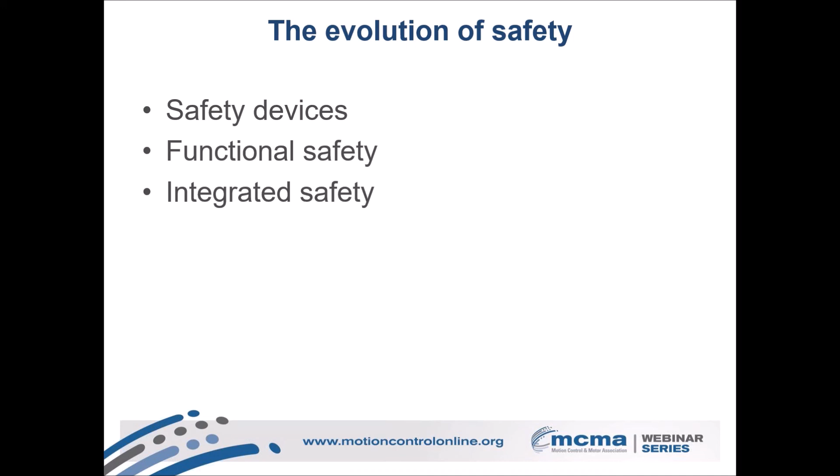But first we should probably look at the overall evolution of safety. It started out years ago with the aim of protecting operators, obviously from damage and mayhem and that sort of thing. It evolved subsequently into functional safety—I'll talk about that, which is much more of a systems-oriented rather than device-oriented approach towards safety. Then more recently, the components and functionality that enabled the latest generation of functional safety are really being advanced by integrated safety. By tying things together, that's where we get the real benefit. And that's the main thing I'll be talking about today.

The philosophy of safety, the overarching way to think about it, is that you want sensors out there looking to detect anomalous behavior by the operators of machines. What happens next isn't necessarily defined by a specific state—it's really the goal of getting the equipment and the machine to a safe state, some sort of known safe state. For example, if you're talking about the field bus aspect, if you're using some sort of machine-based network, the safety philosophy is that the system really just needs to know whether there is a flaw in communications. If it detects a flaw, its job is to bring the machine to a known safe state so that nothing bad can happen at that point. So that's the underpinning behind all the systems we'll be talking about today.

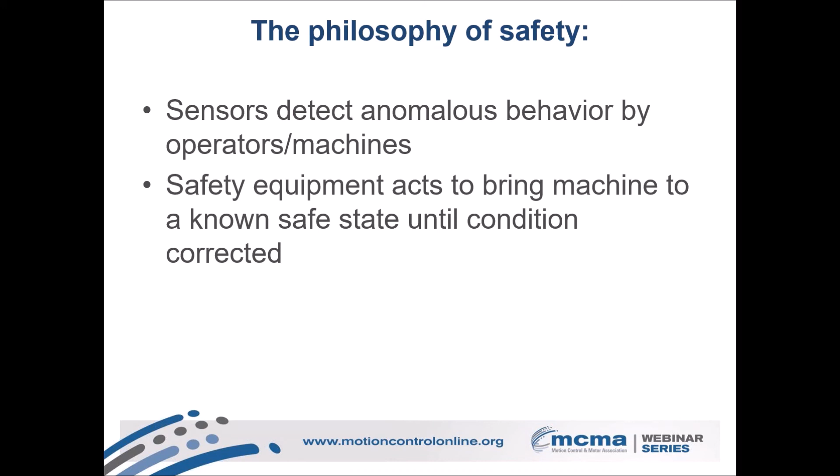Traditional manufacturing was the same thing we've heard about over and over: fixed machines, consistent product. You've got companies manufacturing the same thing 24/7 on a dedicated line, and safety was very much from the standpoint of protecting operators—you want to separate people from motion, make sure they can't get hurt. And that was something that could be implemented very statically because you had the fixed machines and the consistent manufacturing.

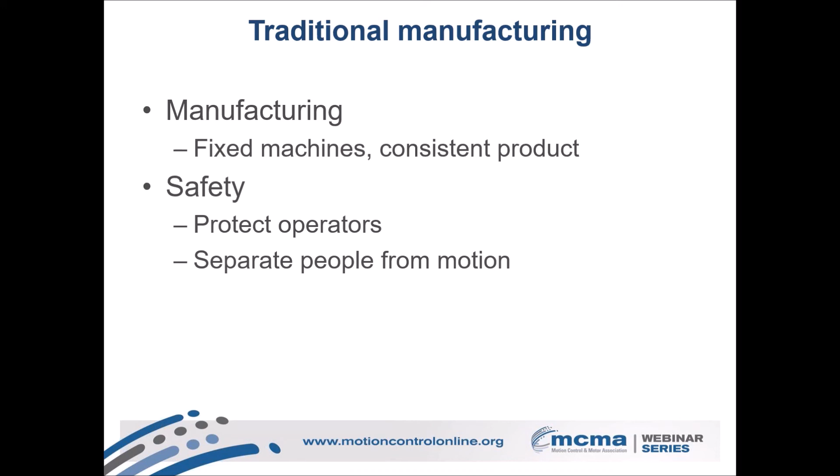The overall design was very much to place safety within the devices. So you put up a barrier, you put up a light curtain, you put in a pressure mat, and the idea was pretty much go, no go. And you might use a controller to make all of this happen.

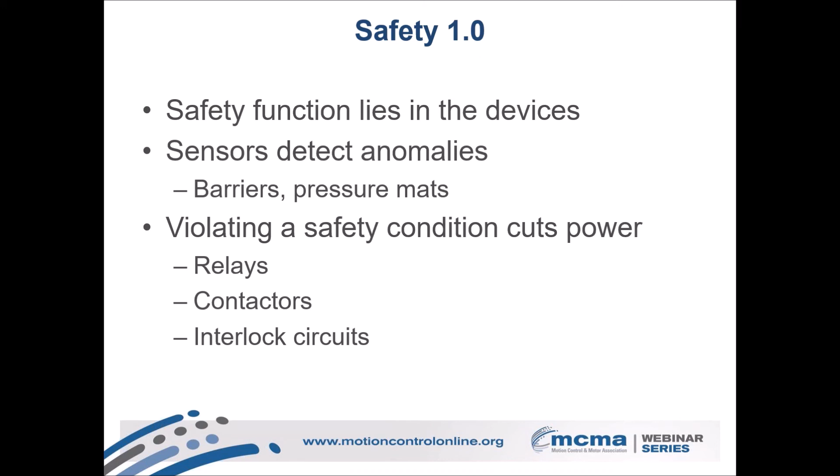Typically, things were hardwired back in the day, and you wind up with basically cut power. If something happens, somebody walks through a light curtain, they open up a barrier, you get a door interlock, your relay goes bam, and the system shuts down. And that, of course, can be a problem if what you're doing is trying to manufacture stuff.

And that's where you kind of wind up with this sort of uneasy relationship between safety and productivity, because on one hand you want to protect operators, but part of the act of protecting operators means shutting down the line, and your safety 1.0 kind of implementation.

Productivity goes down, throughput goes down, and these days there's so much focus on OEE that people are really looking at those numbers, and unfortunately what you can wind up with is operators well-meaning and sort of focused on, hey, do the best for the company, do the best for their shift, trying to do workarounds. We'll talk more about that in a minute.

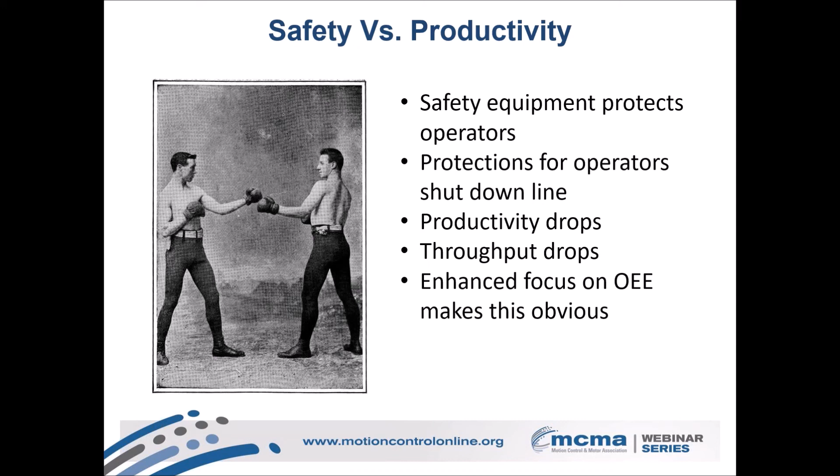But that's particularly become an issue these days because manufacturing is different today than it ever used to be. Everybody's looking for customization. We're all after the fabled batch of one, where you can get people exactly what they want, and that means that you've got your lean inventory, you've got manufacturing on demand. You need to be flexible. You need fast changeovers. You need frequent changeovers.

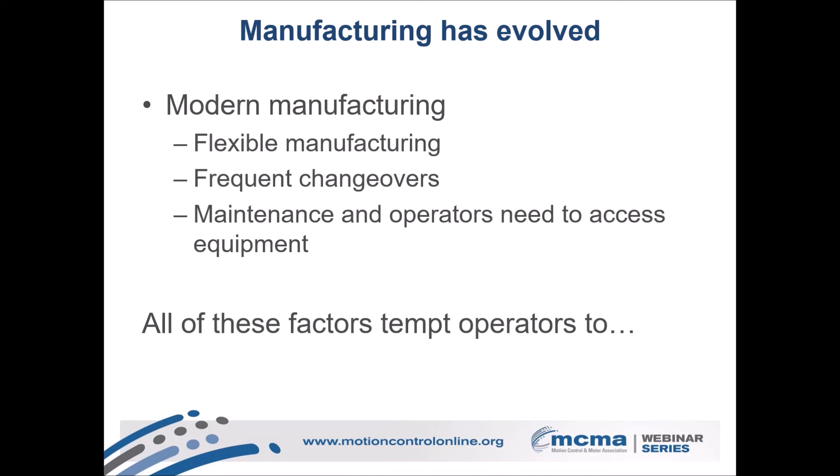That means your operators need to potentially get in and access equipment. Your maintenance people potentially need to get in there as well. And unfortunately, what happens is you get people wanting to, again, find workarounds.

One of the people I interviewed a month or two back for the article I wrote said that she absolutely hates relays because they're so easy to rewire. She says people can do a workaround and that's taken care of, and maybe it lets people keep running the machine while they're opening enclosures and stuff.

But if you wind up with situations where you had static manufacturing, like in this example, you've got something falling off a conveyor belt, and maybe if you had a consistent 24/7 dedicated line, you'd put up a guard and you keep those boxes from falling out so people wouldn't get irritated that they keep having to stop the line and go in and pick up the box, restart the line, lose numbers and all of that.

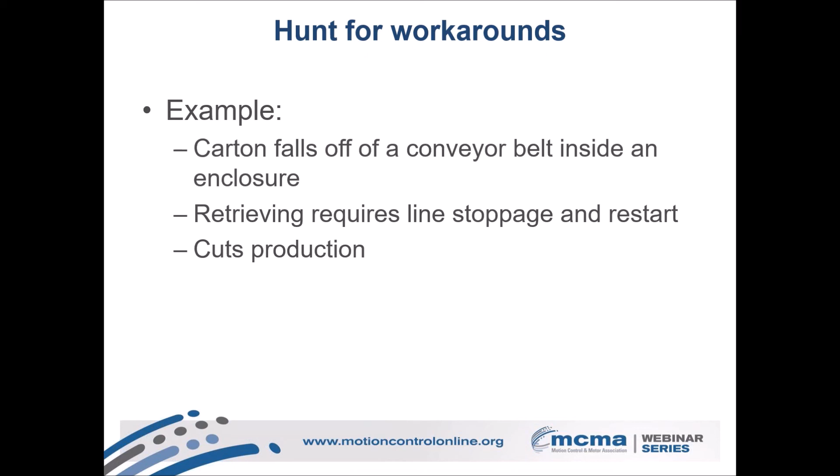But if you're constantly switching around inventory, maybe that's not practical. So what happens? You wind up with people getting the bright idea to rewire the relay or bypass the interlock. Maybe they forget to switch it back. Maybe it's just easier to leave it that way.

Now you've got engineering and management, they think the area is safe. Somebody's going to get hurt one of these days that doesn't know about it, kind of thing. And like I say, she was seriously ranting about how much she doesn't like them because she thinks it's dangerous.

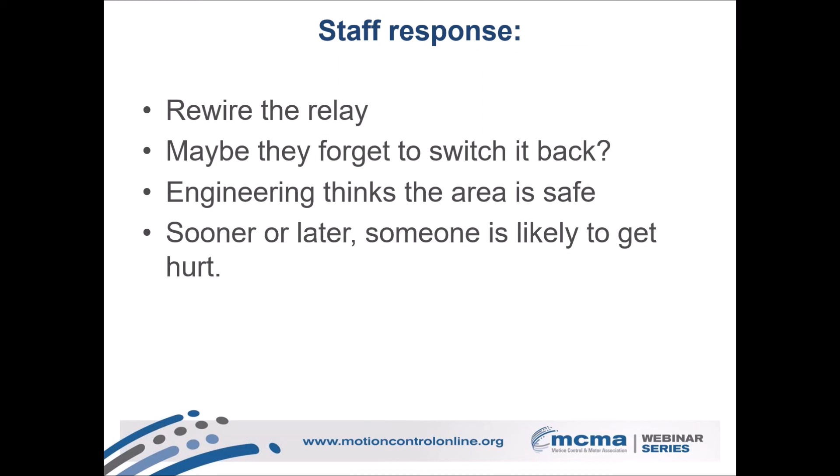Going to smart safety gives you a much better way of attacking these kinds of problems. So that is part of what sort of led to the evolution toward functional safety.

And the idea there, for those who are familiar with it already, is it's very much putting safety in the function of the system. So instead of safety kind of residing in the component, say a pressure mat, you step on it, bang, it's going to stop the machine, now it's the safety in the operation of the system, which goes back to what I talked about at the very beginning.

The philosophy is to create the safe operation of the system. If something or someone goes outside of the operating parameters that you set, the machine needs to recognize that and go to a known safe state. So that's very much systems-based.

Now, it's important to note, even though functional safety has really become tightly associated with some of the more sophisticated techniques we'll be talking about, it can and is implemented with basic safety components like we've been talking about, and implemented with relays. And that might be the best approach.

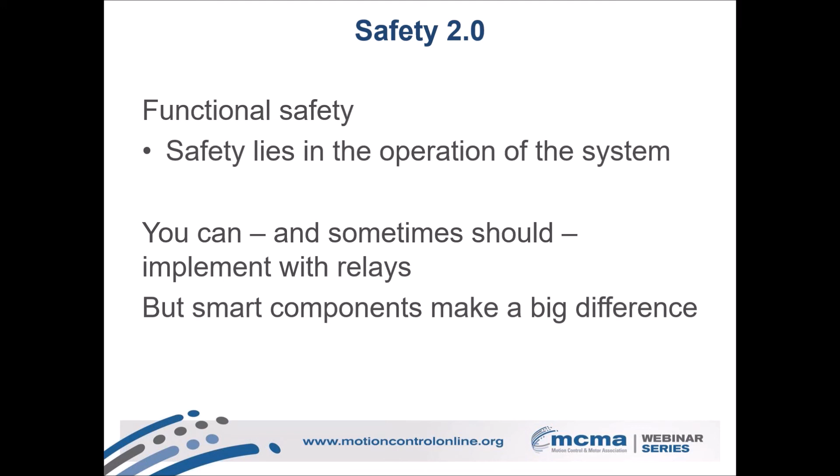So certainly one of the things they took away from this whole project is there's, as with pretty much anything in engineering, there's no one right answer. And there are systems out there, relays are the right way to do it. That said, smart components can make a big, big difference in functionality and everything else.

So going on to modern safety equipment, the idea is still let's protect operators from injury, but safety is a much broader definition than that. It's about protecting equipment from damage, and these days it's also about protecting revenues and performance. It's as much about, first and foremost, it's about protecting human beings, but after that, it's really a profoundly powerful tool for protecting the bottom line.

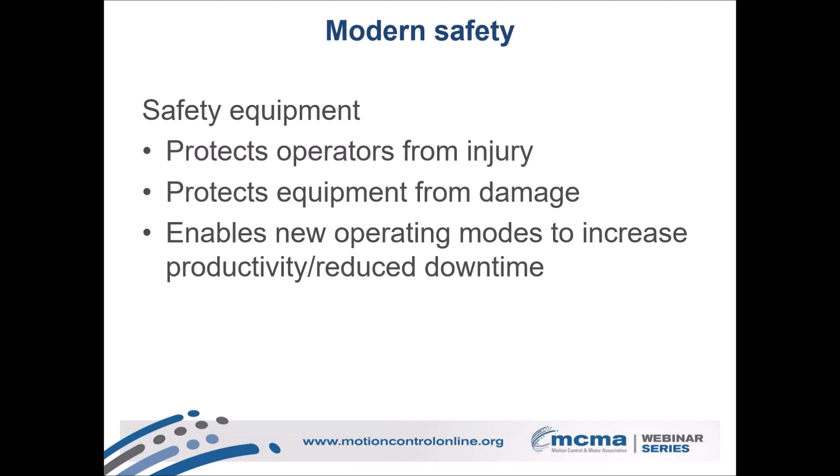As far as the safety standards that underpin that, anybody who's looked into this knows there are dozens of them out there. But the key one for the purposes of this discussion that we really care about is IEC 61508, the primary functional safety standard. It defines the safety integrity level framework that sets a limited number of errors at the -6, -8 levels, so you have to have equipment in place and tested to operate to those levels.

62061 runs through the implementation of 61508 and is particularly applicable to motion control. If you want to swing toward ISO, 13849 is the ISO version of functional safety, and its version is safety performance level.

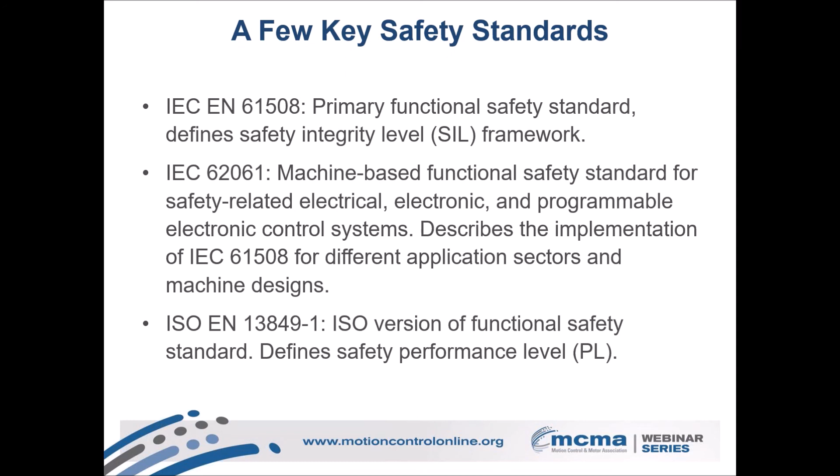If you look in the various functional safety standards, part of what is really valuable about them is that they define a number of much more nuanced functions. Most people are probably familiar with safe torque off, that's gotten to where it's pretty much a standard. Not every drive has safe torque off, but an awful lot of them do, and it's really specified into a lot of machines.

What happens with the rest of these functions really depends on where you're at and who you're dealing with. In Europe, the functional safety standard is a regulation, so you wind up with a lot of broad use of some of these functions I'm going to be talking about. In the United States, not so much, but that is increasingly being adopted as end users and OEMs are starting to really recognize the value of having some of these functions.

So you've got your safe torque off. You've got a safe stop that sets up a method for safely braking high kinetic energy equipment, but doing it quickly, and that sets it up for safe torque off. The key point about safe torque off is, unlike relays that just cut power, safe torque off takes torque off from the motor via the drive. You don't actually shut down the equipment, and that means startup is much faster. It's also easier on the equipment.

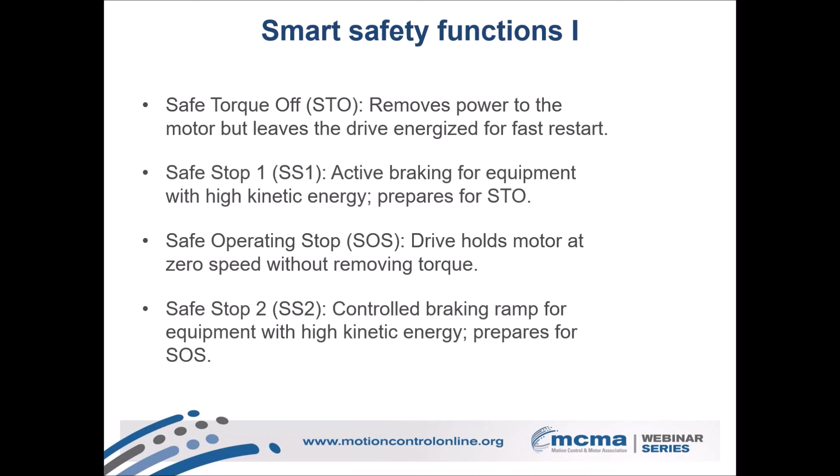Another safety function is external holding brake. That's important, especially for motors holding loads on vertical axes. And then the next three are the ones that are really interesting. There's a bevy of other versions of these functions, but I'm just presenting a selection.

Safe limited speed lets you set up a maximum speed so you can only go to a peak level. You can also set up a speed range, high and low, so your drives can only command the motors to run within that range. Safe direction means that if you have a rotating axis, it can only rotate towards you or away from you, so you've got the ability to really constrain motion. Safe limited increment lets you support jog operations.

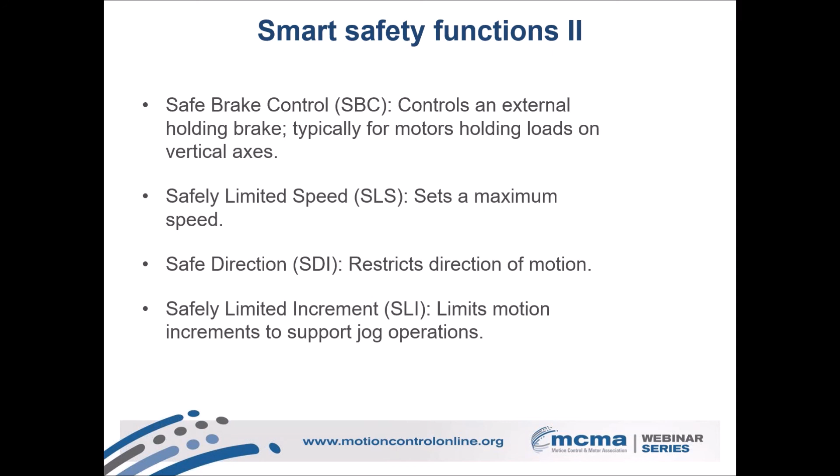What these things can do for you: during cleaning operations, or if you've got a jam, you're able to only have rollers move away from the operator. So the operator can use safe limited increment, clear the jam, and do it in a way that doesn't present any hazard to them, but also speeds recovery. It means the machine handles the recovery instead of the operators having to get in there, so things happen faster, with better productivity, and everything's safer.

So let's take a look at a couple of examples on what that exactly means. If you've got a printing machine, you have to clean the rollers, right? And if you want the old school approach, that's clean the section, then you step out, close the enclosure, start things back up, you jog the machine, you come in, you clean.

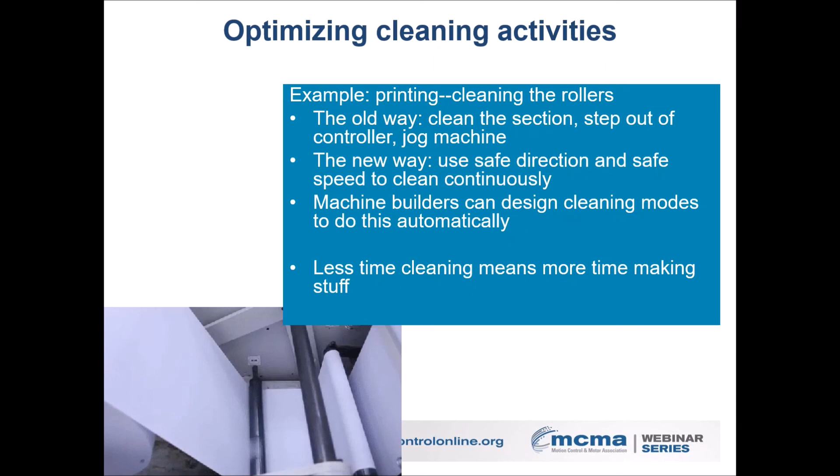And now that you've got your interlock coming into place, it shuts down the machine, repeat over and over. Now you can use safe direction, safe limited speed, and you could be in there cleaning it continuously. And you can have specific cleaning modes to let you do this automatically. So less time cleaning, more time making stuff, higher OEE - we like all that.

And here's a particular case study, food and beverage. So this was a company that spent time doing the clean and jog cleaning, and 6 hours a day they spent just cleaning. They implemented a version with safe speed, safe direction. They used safe position protocol, which limited the safe operations when the enclosures breached. It cut the cleaning time down to 1/3 of the previous time. That's an extra half shift of production.

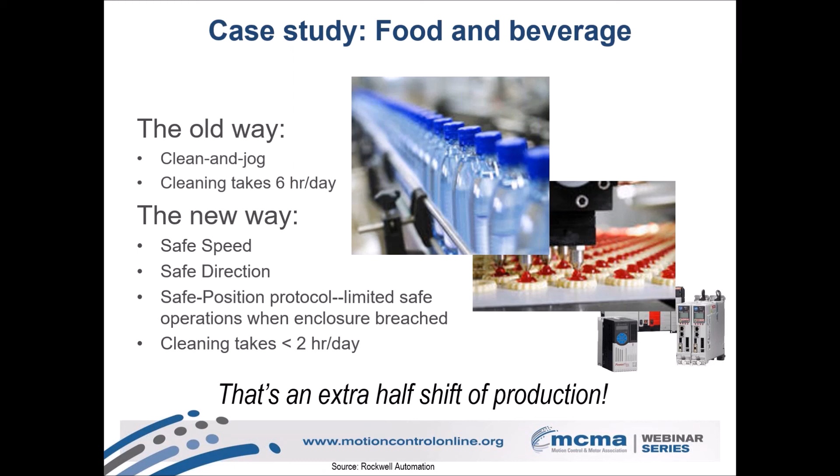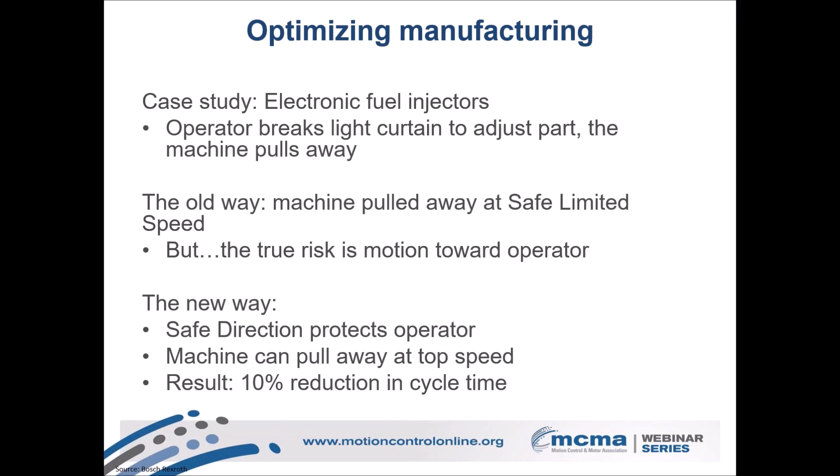Another example, electronic fuel injectors. That was something where the operator had to break the light curtain to adjust the part, and the machine pulled away. Now the end user/OEM, they were already using safe limited speed, and that sped up things a certain amount. But the thing they realized is, because of the application, what was really important, or dangerous, was motion toward the operator. When it was motion going away, it didn't matter, so they could go top speed instead of pulling away at safe limited speed. And again, 10% reduction in cycle time.

10%, you can take that money, you can increase production without higher capital. You can maintain production with fewer operators. You can take that time for preventive maintenance. 10% is a big savings.

And that's the thing to keep in mind with these kinds of systems. The sense I get talking to integrators and OEMs and folks out there, the end users even that I've spoken with - people are starting to get the fact that you have big savings. You can get ROI on this. You get lower total cost of operations.

And that's something that's of increasing interest out there, especially in the end user community, because you can get that savings. You've got to get everybody involved in the specifying. If you're just going in through engineering, you're probably not going to get much buy-in as far as cost of ownership. You might get buy-in as far as uptime and productivity, but the thing to keep in mind is you can go so much farther than safe torque off.

So it's really a competitive advantage angle. And the kind of buzz that I'm hearing is in the next couple years, it really is going to start seeing huge levels of uptake. There's already a significant uptick.

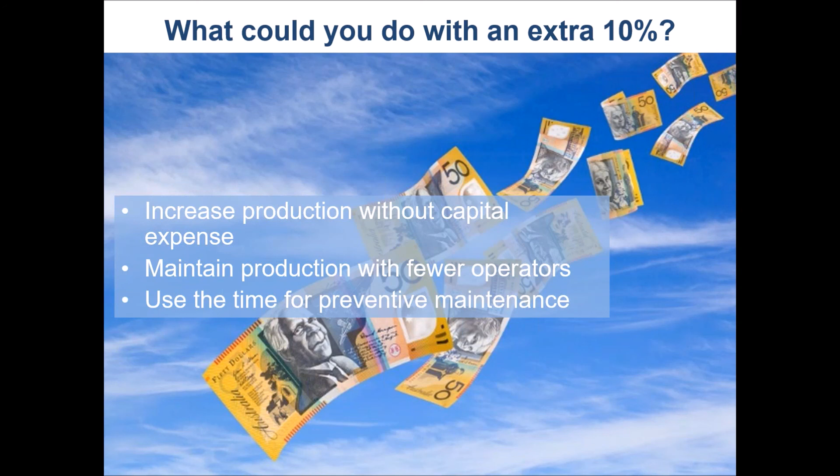So the thing to do, again, and I was just kind of ranting about this - it kind of changes the way we're looking at safety. Safety was a response: the anomalous behavior hits, we cut power. But at this point, it really becomes more of a process. This behavior happens, here are the things that we do. Here's how we respond. Here's how we make sure that the machine goes to a known safe state.

And maybe that known safe state is, as I talked about in the earlier examples, it pulls away at top speed, but only in a safe direction. So a known safe state doesn't have to be safe torque off or safe operating stop. A known safe state can be just constrained operations that let you get done with what you need to do without putting anybody at risk, and also without putting your production at risk.

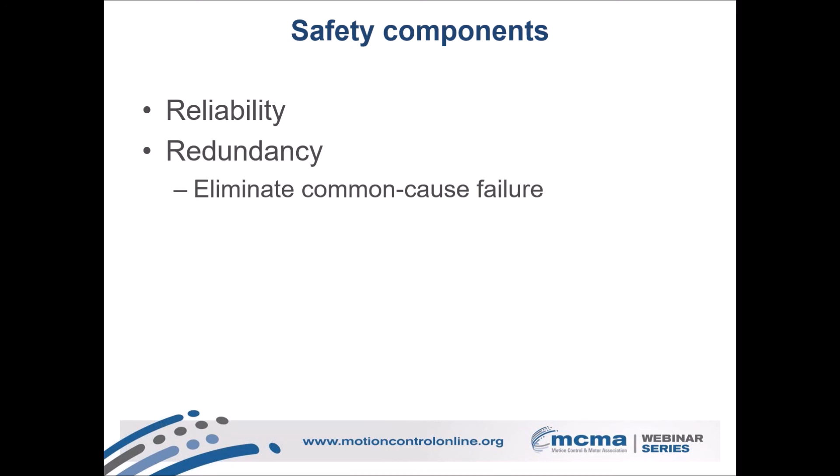So with safety components, kind of the key thing we care about there is you really want to be thinking in terms of reliability. It doesn't do you any good to have a safe system if the safe system fails. The other thing you need is redundancy, because if you've got a safe system, but it winds up with a failure mode that matches the failure mode of some other part of the system, then it's not going to be able to detect error. So that's really the key thing you always have to be thinking in terms of: how do we avoid common cause failure.

Drives and controllers lie at the core, pardon the pun, of safety. You wind up working in terms of dual core processors, and that's key to making sure your safety calculations are happening in two different physical locations with two different physical pieces of equipment.

But that alone isn't enough. Remember, we're talking about common cause failure. You've got to be using different logic. In most cases, or in many cases, you have different chips. You can even potentially be using different manufacturers.

The language that gets used a lot is homogeneous versus heterogeneous. If you've got a drive with a dual core processor, is it homogeneous where you've got identical cores, or is it heterogeneous where you've got two different cores? In that case, if you've got an interpolation error common to a particular processor, you don't want that to affect your safety. But if you're using a different algorithm and checking to see that you get the same response, maybe that takes care of using the homogeneous version.

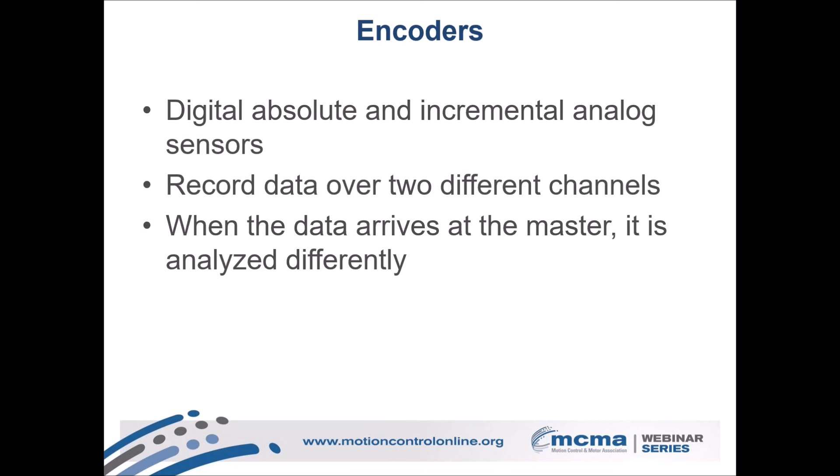Software, same thing. You've got to use multiple different algorithms. You'll have internal checks. You need to verify equipment's installed and operating. In a lot of cases, checksum codes can be used to detect anomalies, and also to detect whether changes have happened to the code. You'll want to use permissioning, access limited by job role, so engineering maybe can save changes, maintenance can only view, operators can only view, that sort of thing. And again, it's just that theme of protection, protection, protection.

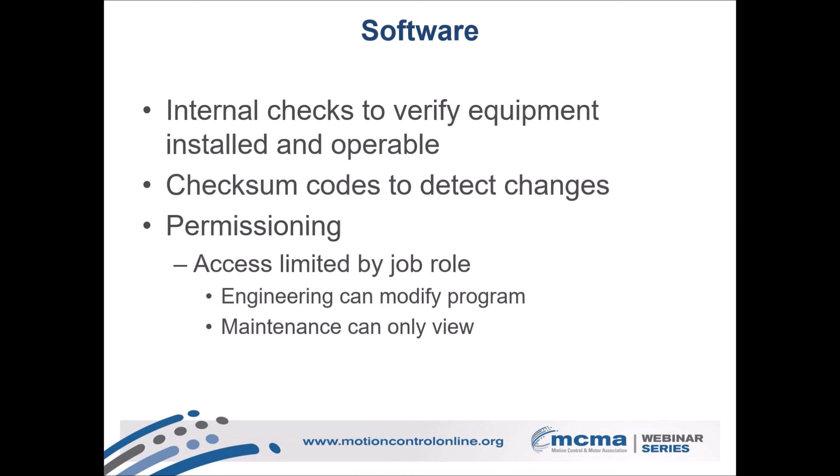So, as I said earlier, you can do functional safety without smart components, but you really need the smart components to get the best. And to get the best from the smart components is where we really start looking at integrated safety, because that's what brings it all together.

That's where you start getting large benefits in terms of speed. You're going to get faster response, easier implementation. In a lot of cases, you can use less hardware. Because of that faster response, maybe the clearance distance or offset you have to use isn't going to be as large, because you don't have as much latency involved. So it goes back to that same thing: you can keep everybody safe, but you can also keep the bottom line safe.

Because ultimately this comes down to productivity, and the thing that is really worth investigating in all these systems is finding out just what the ROI is, what the likelihood is of getting savings, how quickly you can pay for that system. And you might be quite surprised.

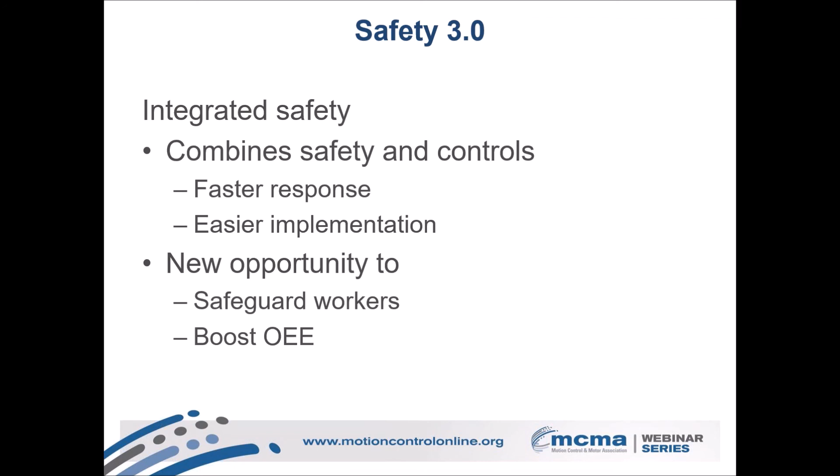So integration levels go at a couple of versions. You've got integrated software, and that's pretty common in terms of having an integrated software environment that makes it easier to implement, because the programmers and the users look and see the same thing all the time. But it also simplifies programming.

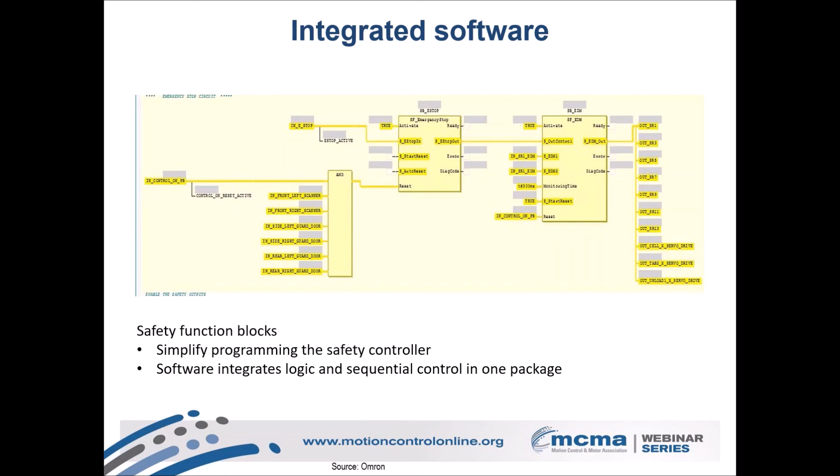In a lot of cases, you can get systems that will map variables over. So if you're defining variables in the safety system, they can automatically map over to the operational system. And that gets pretty detailed. If you've got a complex system, a high axis count, a large number of sensors, that can start getting tricky, making sure everything gets done. So being able to have integration is a big help. It can be as simple as reset buttons and start commands that can really speed up troubleshooting.

I was talking with a programmer who said a lot of times you get troubleshooting going on, and you've got maintenance running through all the screens. If they're having to go separately between safety and operations, they're running through all the safety stuff first because they've got to, and then they find out at the end that the fault was actually invoked by the motion system, and it's just waiting for a command, and somewhere a variable got mapped wrong.

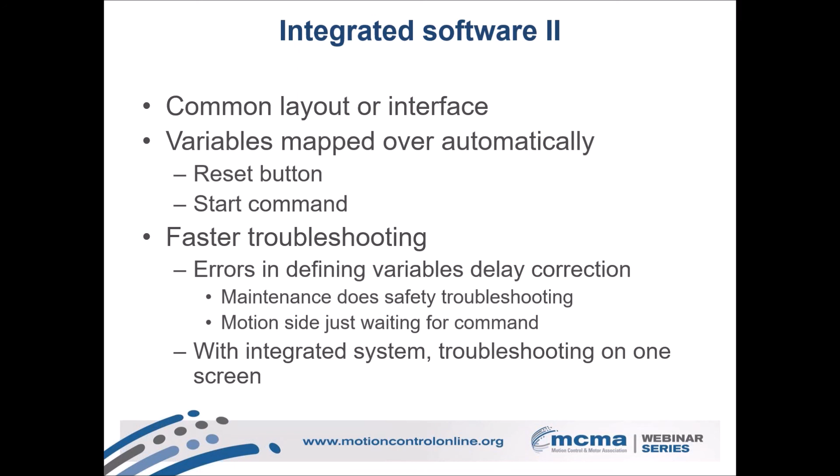So again, the level of integration with software can be really helpful. And that's just an example of one of the screens that you can look at and be able to see automatically the status of equipment.

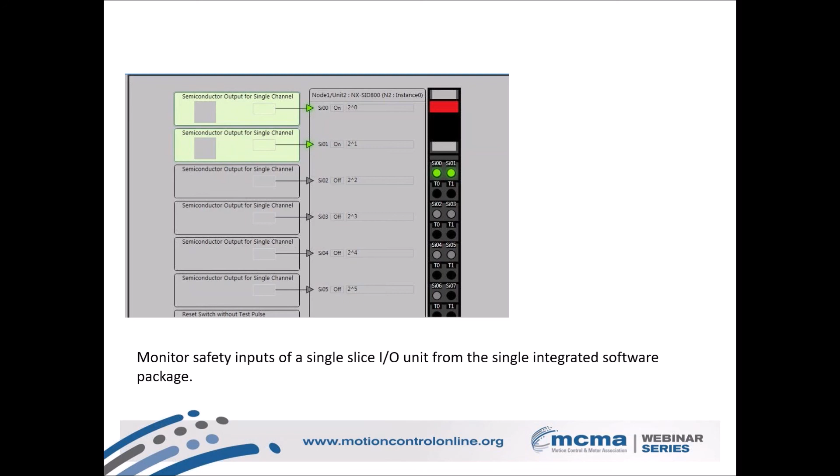And this is where we get to the interesting part, because when I started into this, I was trying to figure out kind of what the basics are with trends and so on. As I said, no general trends.

So let's start with the general safety system implementation, with the understanding that just as soon as I say this, there are going to be people out there in the audience raising their hands saying, wait, ours doesn't work like that. But in general, we start with sensors, we have a safety controller, we have the machine controller, motion controller, and the drives. When I say machine controllers or motion controllers, this can be implemented pretty much any way you like. You've got a lot of safety PLCs out there, and the rule of thumb used to be that PLCs are good at counting, good at timing, good at I/O, and a little bit of motion, but not too much.

If you have really sophisticated motion, you need a motion controller. These days, PLCs have gotten a lot more functional, so you can actually take them much farther. And as much as anything, it's what programming language you're more comfortable with using.

The other implementation with safety is you've got safety PACs, or programmable automation controllers. So I'll probably lapse into mostly talking PLC to avoid having to run out all of them later on here, but just keep in mind that it sort of encompasses the variety.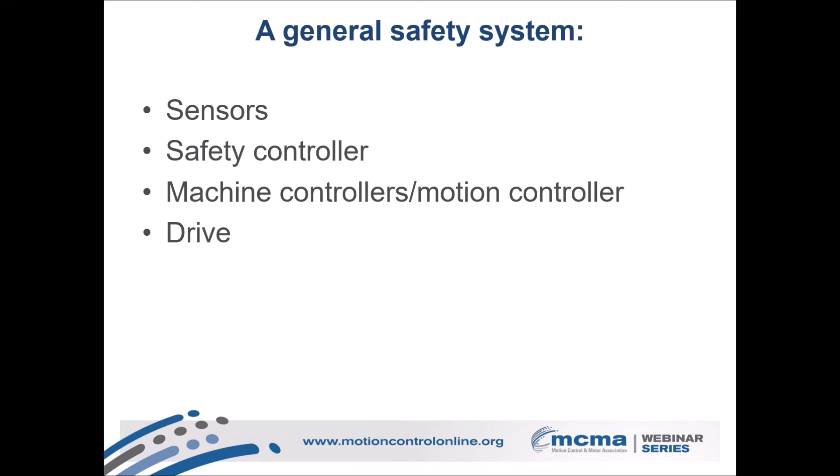Normal operation: your machine controller and motion controller combo send commands to the drive. Safety sensors are out there, and they're linked up to the safety controller. The safety controller's job is really just to run the safety logic.

So it's not doing any of the actual motor control or drive control to implement the safety commands. What it's doing is going through all of the safety logic to keep track of all of the conditions, so that when it's got data coming in, it's able to determine what the right response should be.

And if you've got a really simple system, that doesn't seem too hard. But if you've got a 100-foot printing line with dozens and dozens of axes, and you've got doors everywhere and interlocks, or it's a manufacturing line and you've got barriers and zone safety you're implementing where certain areas are really sensitive to people getting in them and others are not, then you really need the safety PLC to take care of that.

So then the safety PLC sends a command to the drive, tells the drive to invoke whatever state it's supposed to, and then the drive brings the machine to the known safe state. And again, when we're talking about bringing the machine to a known safe state, that doesn't necessarily mean safe torque off or safe operating stop.

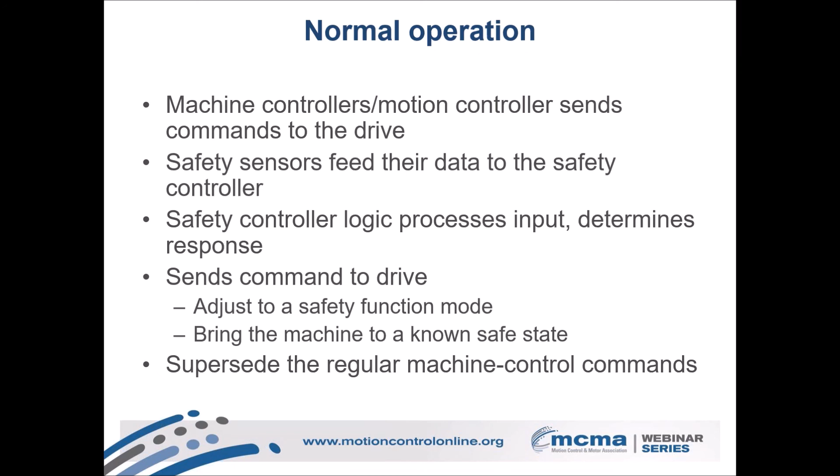So if you've got breaking a light, or breaching a light curtain is the sensor that triggers the machine going into whatever safe state gets invoked, you just need to make sure that the distance between that barrier and the place where the operator can be put at risk is long enough that the latency involved will pass, and your safety command will take priority and get in there before anybody can get close enough to get their fingers munched or anything else.

Now, drives are our first entry into, oh, it's complicated. Drives execute, nominally, safety through the control of the motor. Now these days, most drives that you can get are going to have safe torque off. You can do functional safety, even the kind of safety we've been talking about, with quote unquote dumb drives that are able to do commutation and hand down path commands from the PLC, but aren't set up to do any of the other kinds of features we've been talking about.

But you also have your safety-enabled drives. Safety-enabled drives have built-in functions beyond just safe torque off, and some of them can take a high number of I/O, and then they've got the safety functionality, and in some cases that's all you need. If it's simple enough, you don't need to program your system. You can really just configure the drive, and most of the ones that are that sophisticated will have functionality where you are able to easily configure it. So it's kind of a Garanimals sort of version of safety.

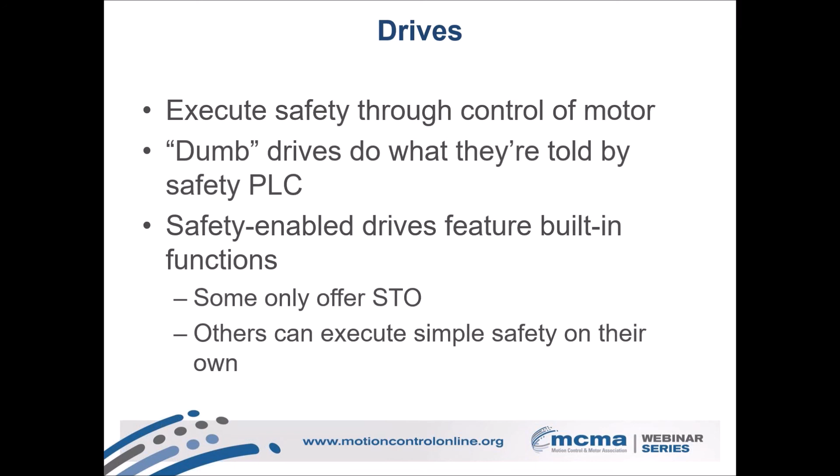So let's look at a few of the varieties out there. Here's one that looks at safety as kind of a decentralized I/O and really pushes through the drive. Up top, you see that you've got the safety I/O. And where is my mouse pointer? There we go.

Yeah, so that's all your safety I/O. That is feeding into your processors. You've got your safety PLC there, and it's going to have your dual core because, again, you've got to have that redundancy. You've got to have something out there making sure that there's no one path that can fail. I mean, obviously if a meteor hits or something, you're not going to be able to be very redundant about that. But in general, the systems are sort of configured for logical redundancy.

So anyway, the red and yellow thing, that's all going through a Sercos-based system. So all of that input is coming into the drives. The drives are able to figure out what happens next. The safety PLC gives them the direction of what to do, and they've got the built-in functionality. The communication, again, takes place over Sercos. You've got the precedence of your safety messaging, and in this case, the drives close the loop with the encoders.

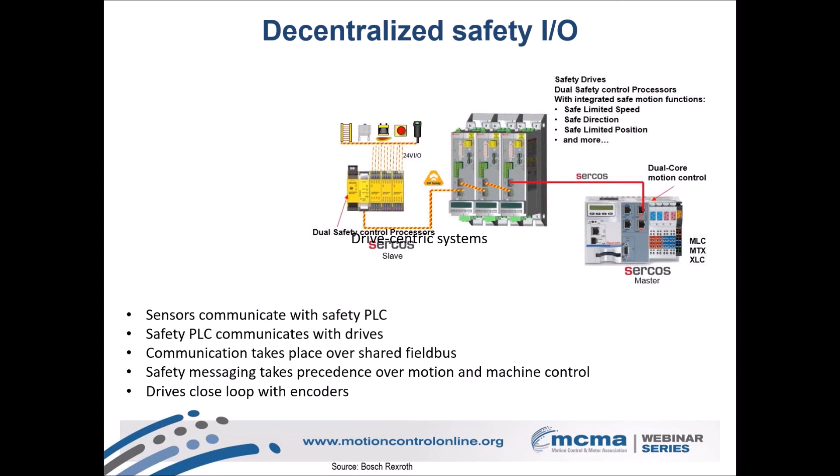And the drives, with direction from the PLC to help untangle any logic if it's a complicated system, are able to go ahead and monitor the conditions with the encoder. They're able to invoke whatever state they're told to by the PLC.

Another version is to again, you've got the redundancy here. You want to have dual redundancy, but this takes a bit of a different tack. You've got one CPU for machine control and safety, presumably on different cores, executing both machine control and safety logic. The redundancy comes from a separate outside backup safety CPU. So you've got one PLC or controller that does your machine control and safety, and then a backup safety CPU that uses a different algorithm and compares results. If there's an anomaly, you take the whole machine to a known safe state.

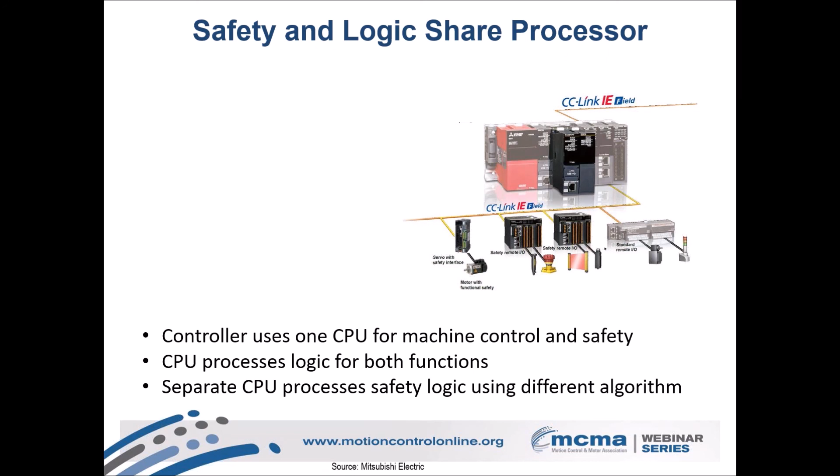And then you've got this one, which should be Rockwell. With this, you can kind of have it your way, as the Burger King commercial used to say. So you wind up with your sensors coming in, you still have your logic, and you've got the automation controller that's able to keep track, taking input from the sensors and controlling the drive, putting the machine in the known safe state. With this you have a variety of choices of whether you want integrated safety and logic, or safety and machine control, or not.

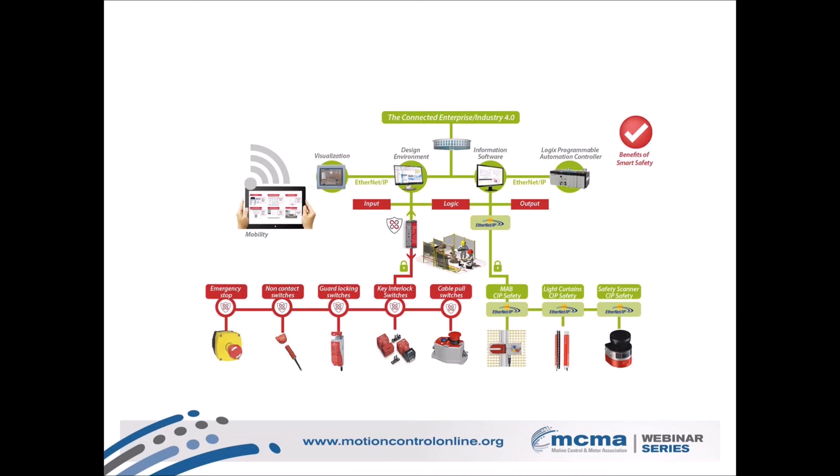Another one is the drive-centric kind of approach. That's going to be something where you've got a drive that can take up to 8 I/O points. This goes back to what I was talking about earlier - you don't necessarily need a safety PLC in every system. You can have a drive handle the safety. It can take the I/O, undergo simple to even somewhat sophisticated decisions about what needs to happen next, close the loop with the encoder, and really get the system into the known safe state. Now the question is going to be, what are your numbers of I/O points? If you've got a high number, maybe you need to rethink that, and that's where the safety PLC comes into play, because it can handle those high numbers.

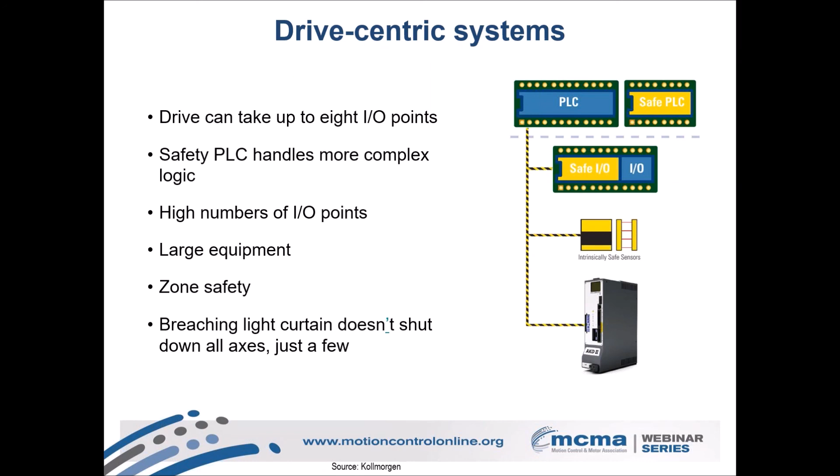And with things like zone safety, you've got pieces coming in where somebody goes into an enclosure and maybe 5% of the axes, or the axes in this one area, this one module, need to go to the known safe state, but maybe the rest of the machine does not. That's where you kind of want a safety PLC to step in and handle that level of sophisticated motion, because it really comes down to maximizing productivity.

So that's pretty much the sum total of what I found out about safety these days, but the big takeaway is that there really is no one direction. The key thing is, if you're an end user, talk to your integrator, talk to your vendors. If you're an OEM, talk to your vendors, talk to your end user, find out what everybody wants, understand the application, because you've got a lot of different options out there. And this just scratches the surface.